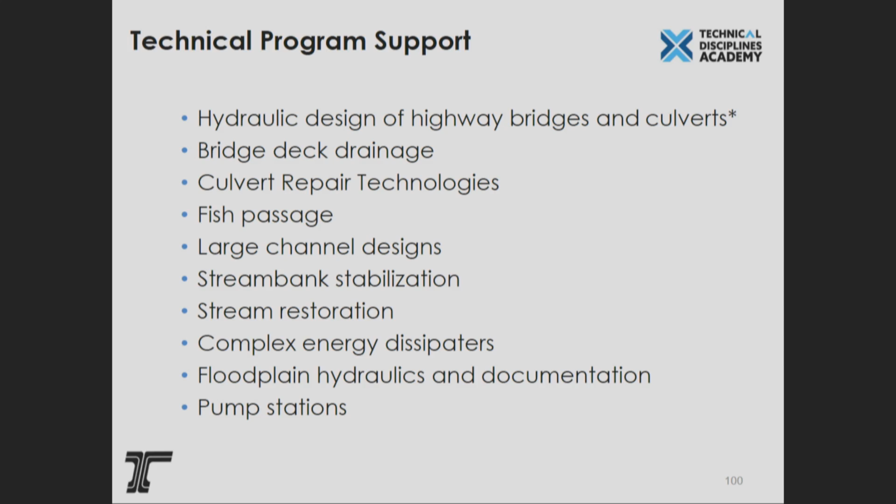Floodplain hydraulics and documentation, that includes FEMA applications, and small pump stations. Typically, if we get into large pump stations, we'll outsource that type of work, because that's a specialty area that also often requires mechanical engineering and electrical engineering and control systems, not just the hydraulics aspect.

Control structures, tide gates, weirs, temporary water management. That's a hydraulic aspect that supports construction. So if you need to temporarily get the water around a construction site and keep it dry, we design those. Structural scour and erosion protection designs for around bridge foundations.

Stormwater quality designs. We actually have an MS4 permit with the Department of Environmental Quality that requires us to manage our stormwater in a certain way, and we also have regulations with National Marine Fisheries and Department of Environmental Quality, and that requires us to do stormwater treatment before we let the effluent enter into the waterways.

Stormwater control facilities, which would be like a detention pond or a retention pond, so that's to alleviate flooding. And sometimes the water quality and the flooding can be designed together. So then it gets more complex, but more efficient for the transportation system.

Roadway drainage, that's getting the water off of the road. So when you're driving down the road and you're hitting a hydroplaning area, hydraulics engineering is covered in the hydraulics manual on how to appropriately put the cross slopes on the roads and super elevations in relation to getting the water off. So even though you don't always need a hydraulic engineer to do that work, we actually provide the training on how to do that work, and lots of times a roadway designer can actually do the roadway drainage work.

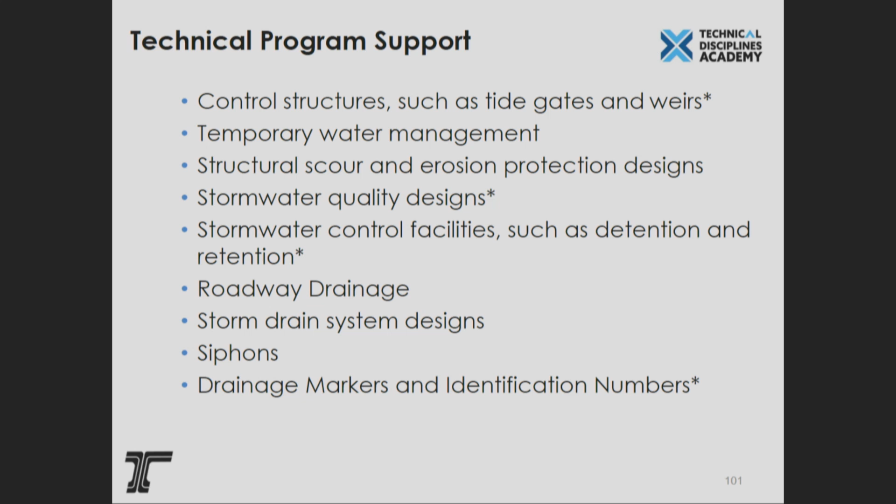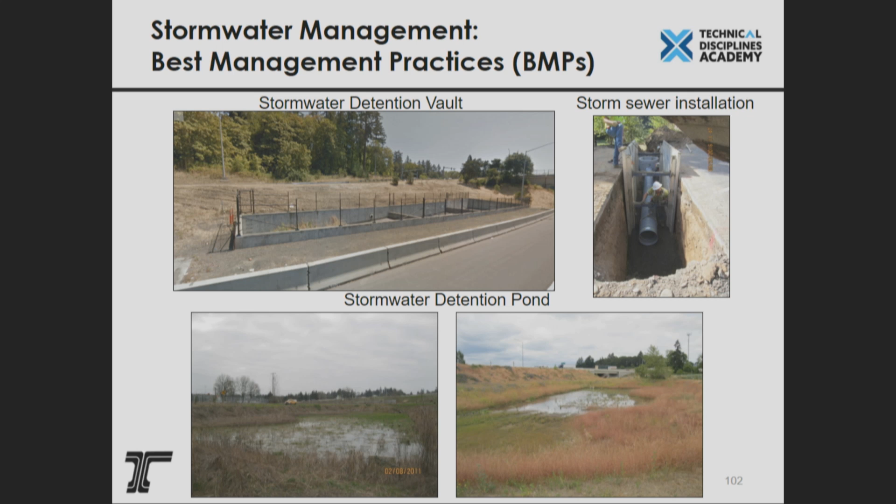And then stormwater detention ponds. If you think they're full of water, you might think, oh, it's failed. It's like, no, it's actually supposed to be doing that. So those are holding back the water so it doesn't flood downstream.

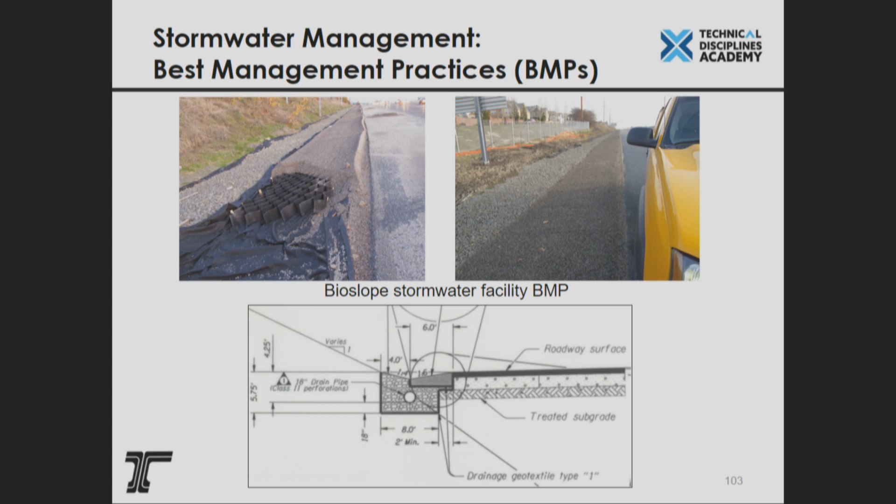Then we have what we call more like lower impact development types of stormwater management systems. These are like underneath the gravel. It's a bioslope where the water goes off the edge of the road and down through some media that we put in there and into the soils and produces infiltration.

Bridge hydraulics. So, you know, the bridge engineers are really important because they design the structural part that goes over the river. What the hydraulic engineers do is they design that hole underneath the bridge. So we work very closely with bridge designers to determine how high it needs to be to make sure that we don't cause flooding upstream or have the river cause erosion.

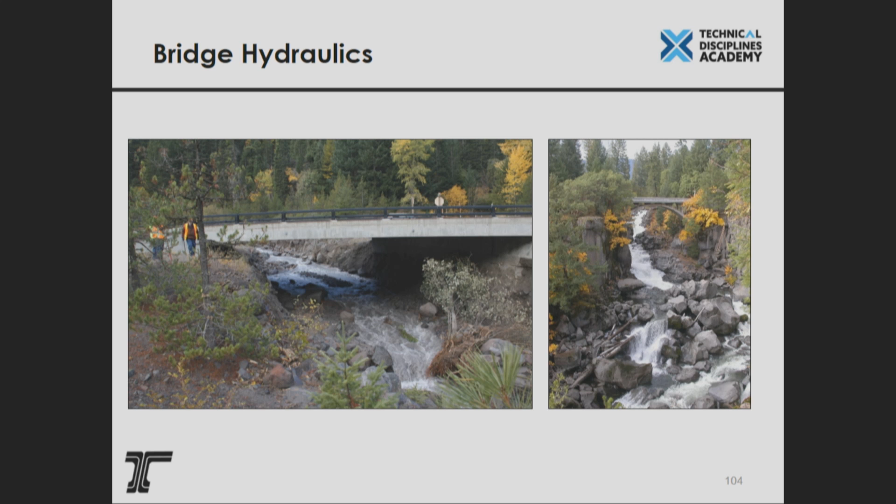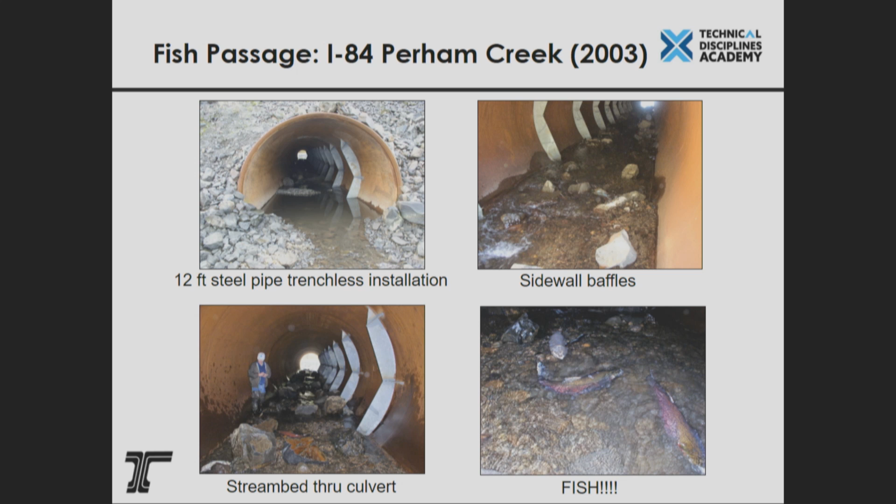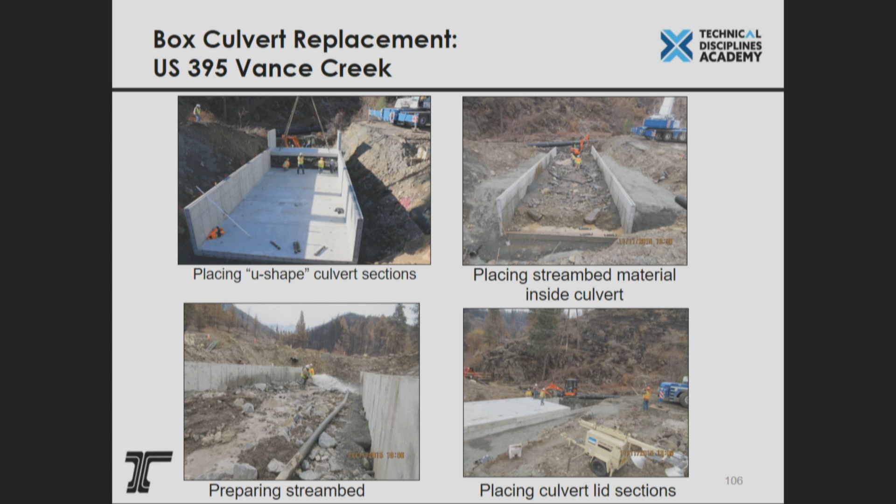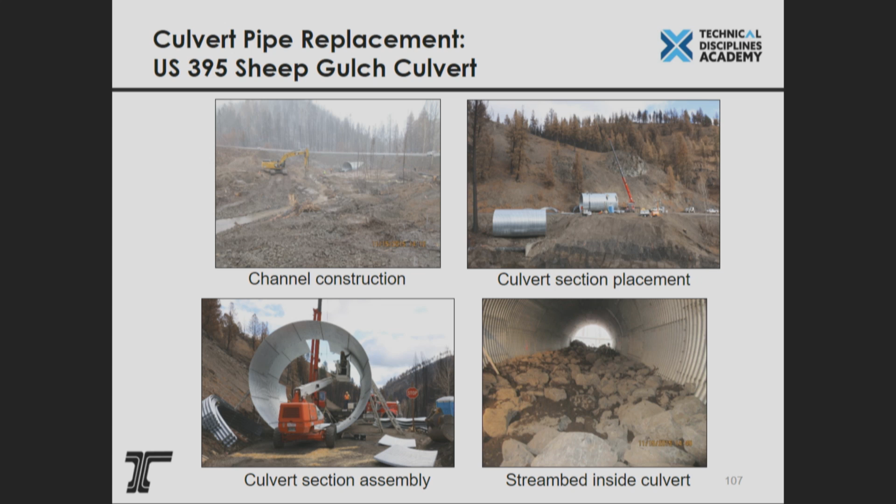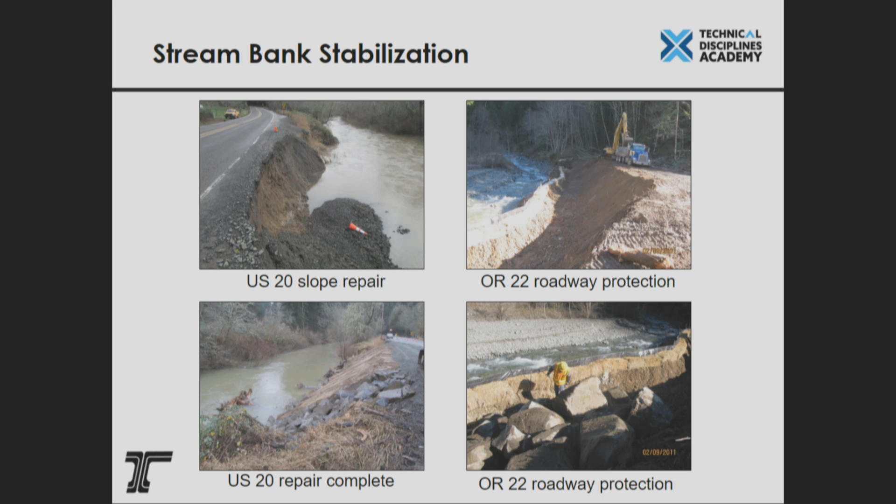Stream bank stabilization. So again, this is a case where you have the river eating away at the side of the road, and so we'll go in there and design a type of mitigation to keep that from taking the road away. And then you have different types of slope repair. Sometimes it's rock, sometimes it's willows with rock down at the bottom. You can put in concrete blocks, all types of things you can do to protect the roadway.

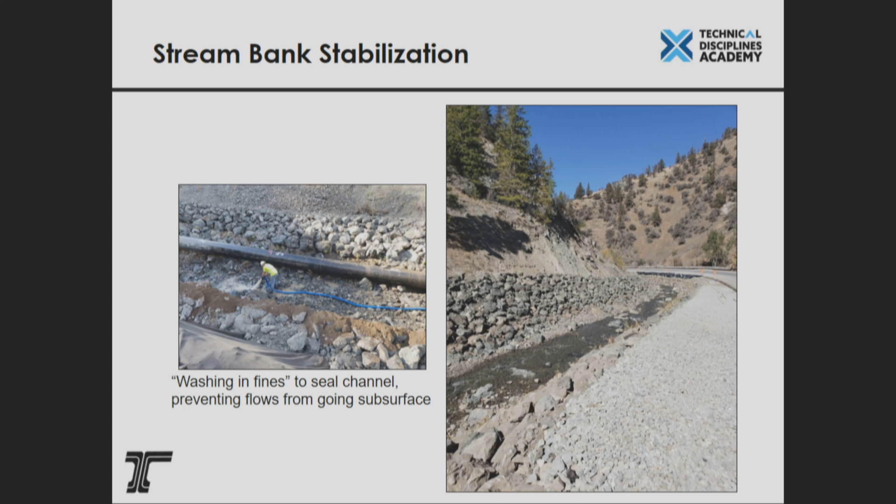Some additional stream bank stabilization here. This is an actually completed project. It's over in eastern Oregon. You can see there's a whole bunch of rock along the sides. So you might say, oh, they're just putting rock in there. Well, actually, there's an engineering process to size the appropriate rock, depending on the velocity and the energy of the water in the waterway. If you just put rock in and you haven't done that engineering, typically you don't put in large enough rock and it just washes away.

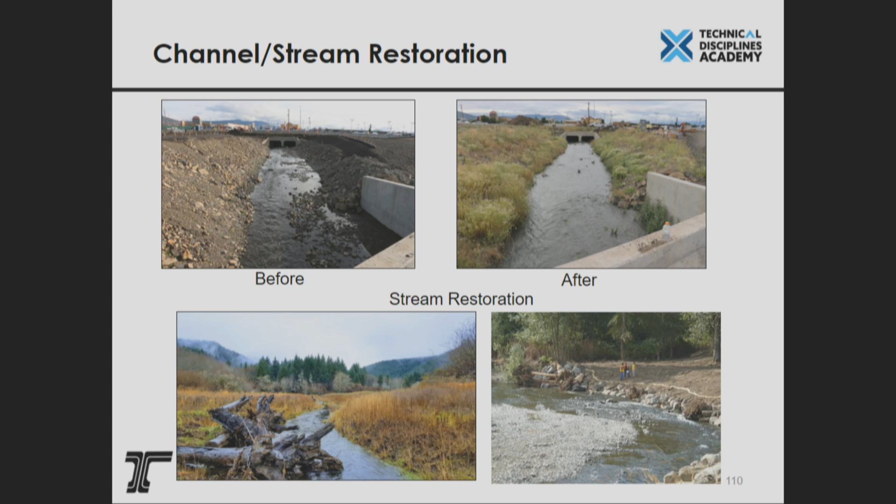Stream restoration: you can see in the before picture where it's just bare dirt and soil and rock, whereas on the right there's some vegetation, that's really important to meet environmental compliance. And the bottom left-hand corner is an even better example, where you have woody debris and sinuous channels, which is more natural than the upper right scenario. In the bottom right, you can see where the stream bank work was more than just rock. It's a combination of rock and wood and twigs and plantings.

This is some of the more exciting stuff that we tried not to have happen, but the big floods in Oregon occurred in 1964 and 1996, the two biggest ones. I was actually here for both of them. Not all of you were.

It's interesting because we do design our roads to not be flooded for the appropriate return period storm. If people talk about a 100-year storm, what does that really mean? That means it has a 1% chance of occurring in any given year. That doesn't mean it only happens once every 100 years. It's a probability. So we're looking at roadway overtopping. You're also looking at how it affects the bridges. You see how it doesn't just overtop the road and go away. Often it washes the road away while it's at it.

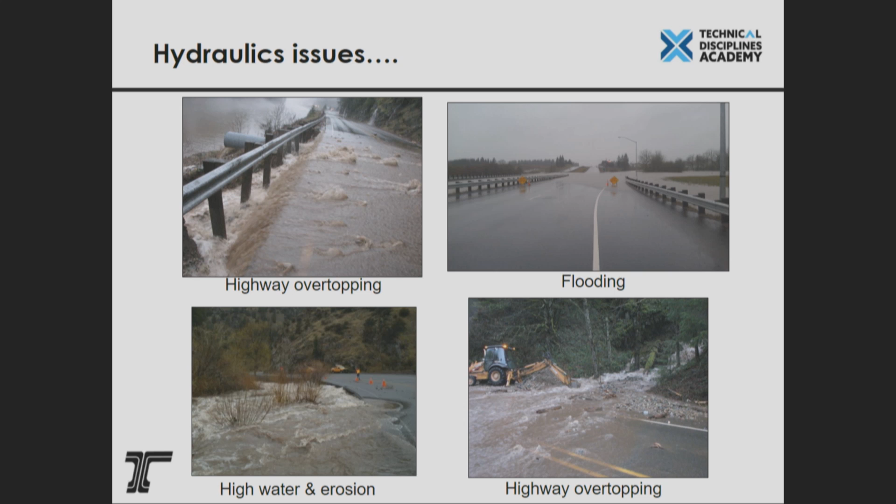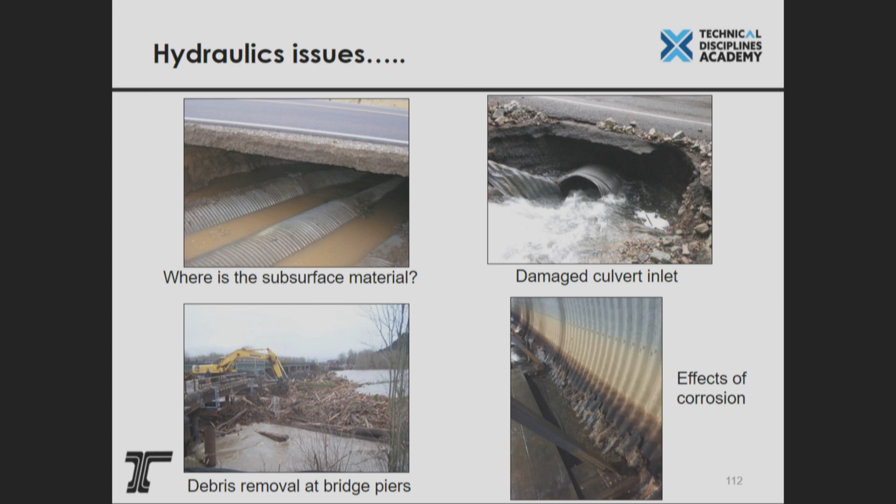And then in the bottom right, you see effects of corrosion. This is where the bottom of a culvert is essentially gone. The only reason it's still staying there is the arching effect of the soils over top of the pipe. And so we go in there with culvert repair technologies, sometimes structural, sometimes not, and try to repair those culverts.

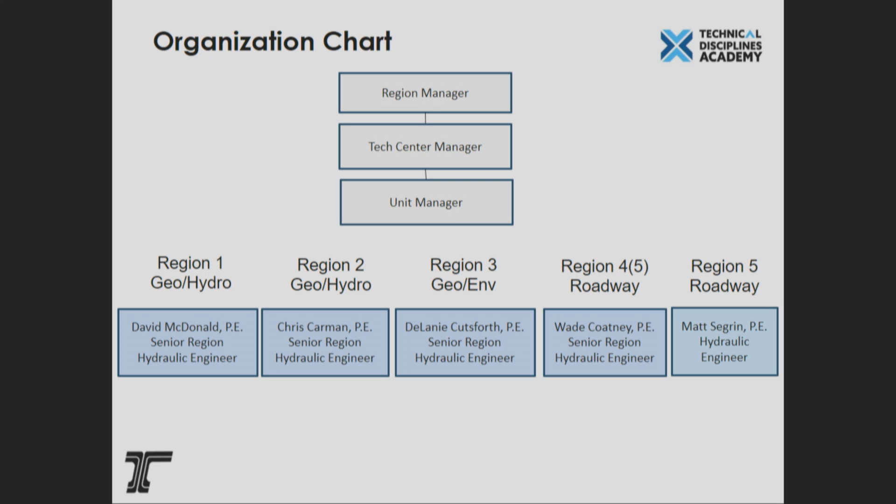So here is an org chart of your region resources. We have a senior hydraulic engineer in Regions 1, 2, 3, and 4. Region 5 has a hydraulic engineer. He's a journeyman level engineer, and we're mentoring him on how to do this work right now. Going to your region hydraulic engineers is a really good resource, and they know that if they can't answer the question, they will come to headquarters, where we have several senior people as well.

I'm the state hydraulic engineer, but we have Robert Travis, Wade Holliday, and Lou Seichow, who I think is somewhere in the room, who helped me put this presentation together. Thank you very much, Lou.

So we have lots of manuals. You saw the big blue ones that we have. They reference a lot of Federal Highways manuals. We have AASHTO guidance. We have an entire suite of hydraulic software, and we watch very carefully who gets that software to make sure you're appropriately trained on how to use it.

We have a design deviation request, just like the geotech design manual does. The approval process is the same: you go through your region senior hydraulic engineer first for preliminary approval, then it comes to headquarters, and then either my signature or the state bridge engineer's for final approval, depending on whether it's a bridge hydraulics issue or any other hydraulic issue.

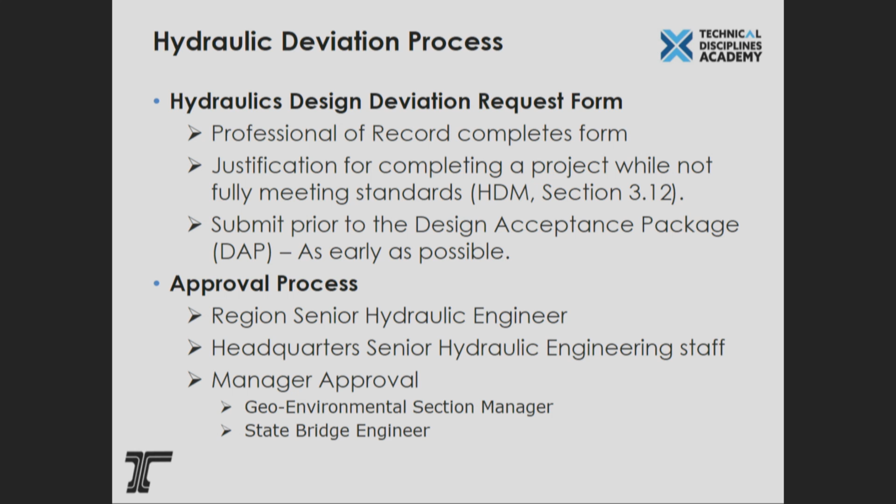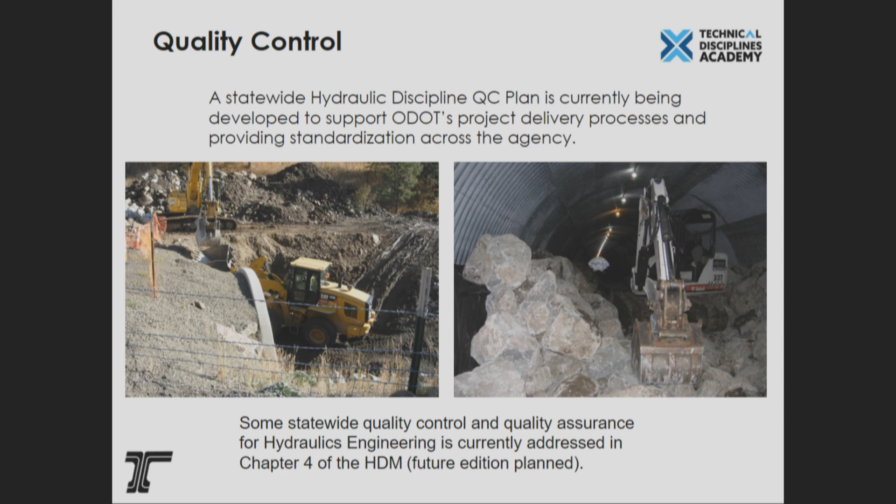And we provide our services primarily to environmental, bridge, and roadway. Success depends on communication. Hydraulics is an iterative process. You start with an area, you do a calculation, you come all the way back around, you see if it worked or not, and then you have to move your area. So it goes around multiple times till finally you come up with the right design.

So in summary, we do drainage facilities with culverts, inlets, storm drains, stormwater BMPs, channel changes, hydraulic structures, culverts, headwalls, fish passage, repair technologies, big bridge hydraulics and scour, stream banks, floodplain studies.

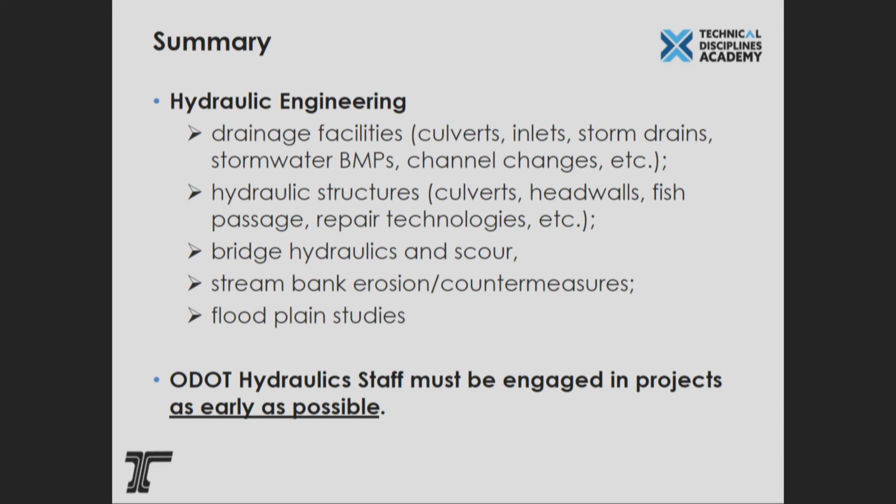And I'd like to point out one thing. If you ever hear any questions in relation to drainage law, there is no such thing. There are no laws on the books in the state of Oregon that talk about drainage law. It's all based on case history.

So where do you get your questions answered? Go to your hydraulics engineer. If your regional hydraulics engineer doesn't know the answer, they'll come to headquarters. We have a lot of experience dealing with the Department of Justice and lots of different legal situations we've had to deal with. So it's really just based on case history and experience.

Thank you. Questions? Oh, no lunch yet. I'm going to walk over here. Stu, why don't you come on up? Then I have a question for you too.

Hey, I got a hydraulic question. I'm from out of state, and one of the big things in hydraulics for floodplain is getting your CFM, the Certified Floodplain Manager. Is that something Oregon does, and would you suggest that we should pursue that? The question is related to the floodplain manager.

Every area of the state of Oregon is a little bit different on who that is. ODOT is not the floodplain manager. It's usually going to be your county or the city. Your hydraulic engineer will know that.

So, well, less as an individual person, more of this being a certified. I think California does it. Texas does. No, that's not a requirement. It's not a requirement in Oregon to be a certified floodplain manager. Again, if there was that requirement, that would be the responsibility of the cities and counties. It wouldn't be ODOT itself. Yeah. Thank you.